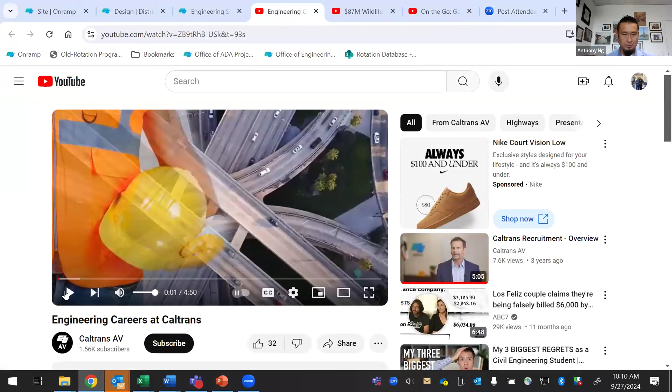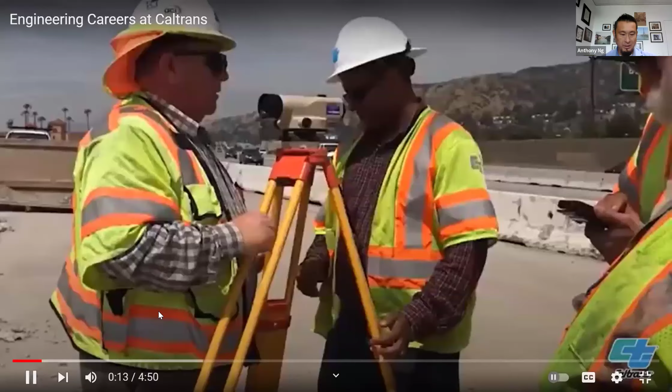Oh Anthony, we don't hear the sound. You might need to share the audio. When you share your screen, it should normally ask if you want to share your audio as well. Okay, go check that. Share, and there you go. All right, how about now?

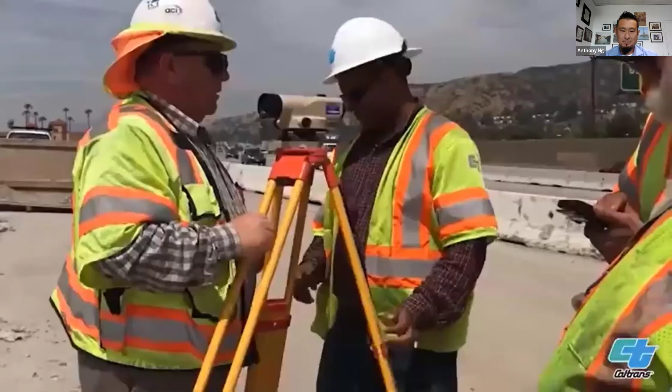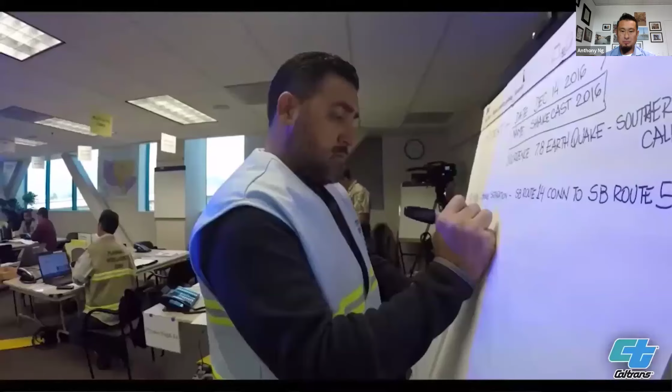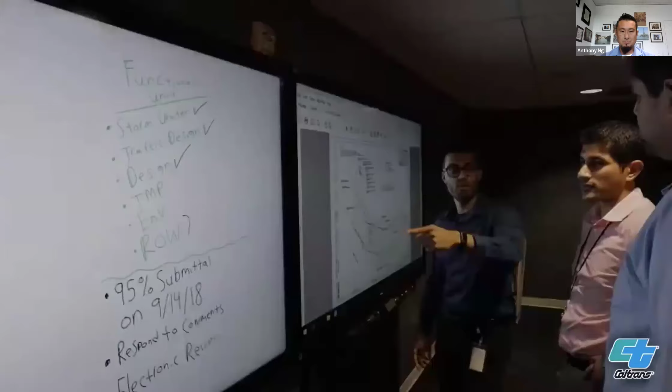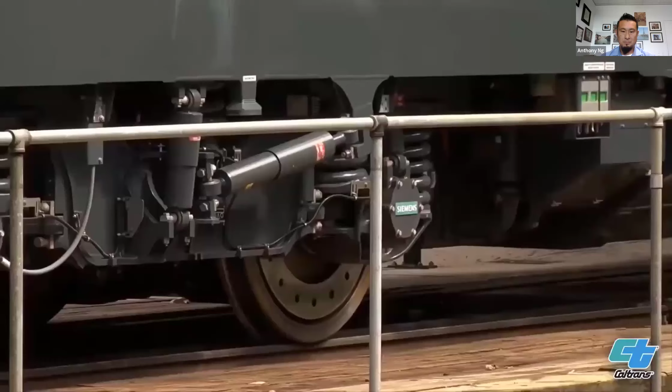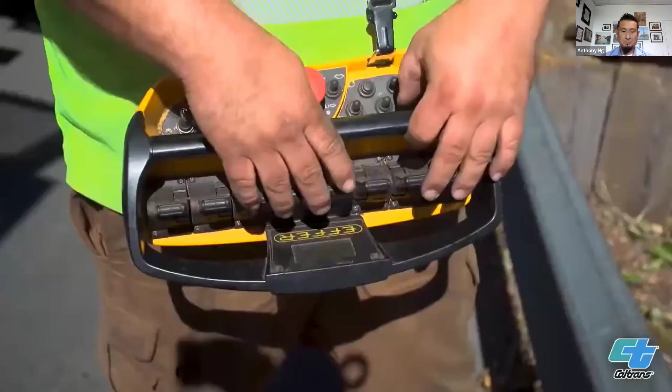Caltrans works with local agencies to manage more than 50,000 miles of California's highway and freeway lanes, funds 3 of Amtrak's busiest intercity rail services, and permits more than 400 public-use airports and special-use hospital heliports. Today, this is my office. One of the things I like most about working for Caltrans is the ability to get out of the office and actually look at the projects we're working on firsthand in the field. Our goal is to be a performance-driven, transparent, and accountable organization that values its people, resources, and partners, and meets new challenges through leadership, innovation, and teamwork. Caltrans is a great place to work.

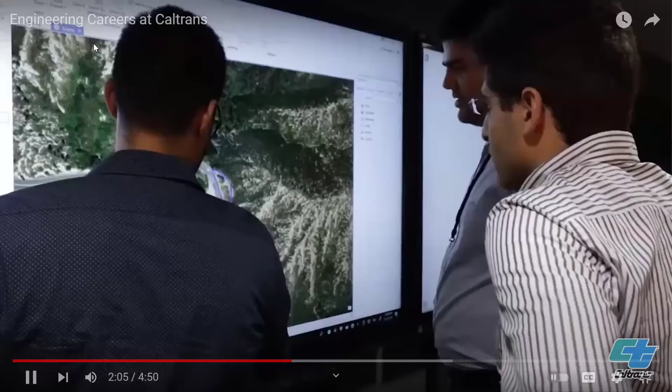Here in design, we prepare plans, specs, and estimates, and we coordinate with maintenance and construction to make sure that our projects are constructible and maintainable. What I love about CalTrans is that there's so much to learn, and I'm surrounded by great mentors who are always willing to help me out along the way.

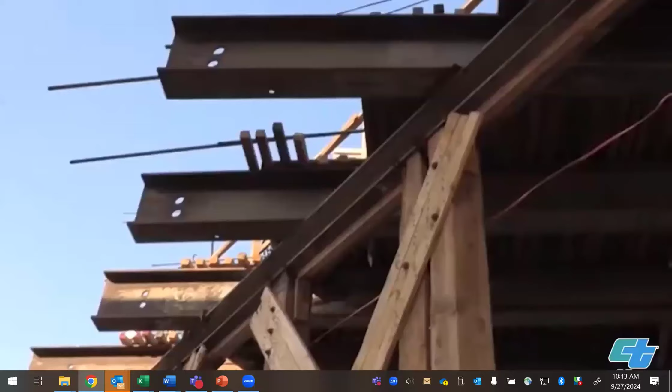There's a certain satisfaction that comes from knowing that I've designed a piece of that infrastructure, and that what I have done is something that will benefit the lives of millions of people.

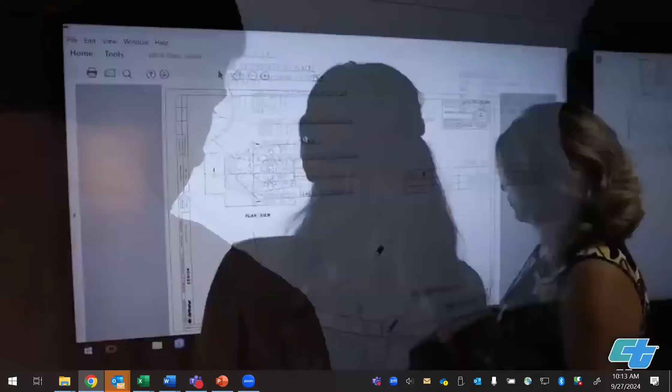I started with CalTrans as a student assistant, and I was instantly drawn to the challenging and engaging projects that I had the opportunity to work on. When a position opened up, I didn't even think twice of applying.

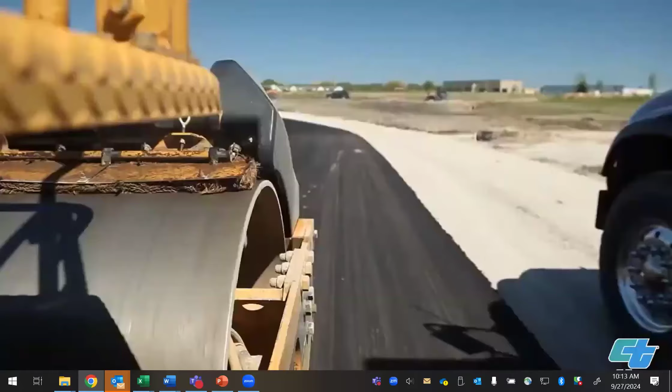CalTrans provides you with the tools and resources to set you up for career success, and working for CalTrans feels like a family. We are dedicated to our vision of a safer, more sustainable, and accessible transportation system for all users. The quality of management and the ability to facilitate and cultivate a positive work atmosphere.

Everyone I've worked with at CalTrans, they know the tangible benefits that they are conferring on the community, and they're proud of it. And they take great pride in not just what they're working on, but the results they see day in and day out.

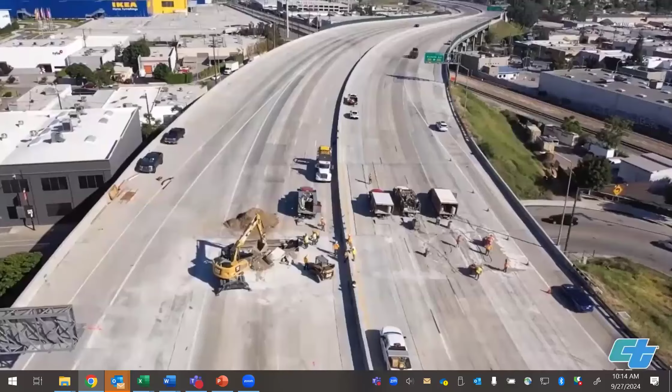So I've been with CalTrans for 26 years, and what I have appreciated the most about working for CalTrans is the opportunities that we have here that you may not have at other state agencies or in the private sector. If you want to work in roadway design or in bridge design, drainage or geotechnical design or environmental engineering, there are so many different opportunities, and you are encouraged to move around.

One of the things I love about working for CalTrans is how diverse we are. So there's a lot of collaboration. Love the environment, love the family nature of working in CalTrans.

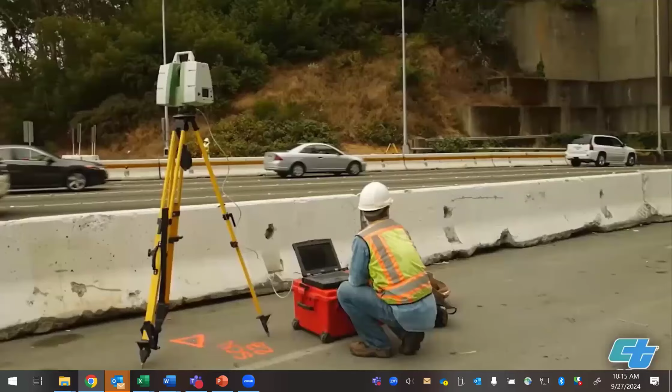As a professional land surveyor, I do have the opportunity to work in the field or in the office. If you love the mountains, if you love the coast, if you love the valley, CalTrans has those opportunities.

I appreciate the ability to explore your career. So if you're not sure what you want to do, there are so many places that you could land and you can find the best version of yourself here.

I would say, do yourself a favor, come work for us. We would love to have you. You would make us better.

Right, so hopefully you guys are all inspired and raring to join us here in CalTrans. But to give you a little bit more background on what else we do here in CalTrans, I just want to go over real quickly the different divisions that we have over here in CalTrans.

So the most important one is design. Once again, I'm from design, so not because I'm the most important one, but it's the most important — that's why I'm in design. But we also have construction, traffic operations, project management, planning, right-of-way, and maintenance. And within each division, there's a lot of different layers as well.

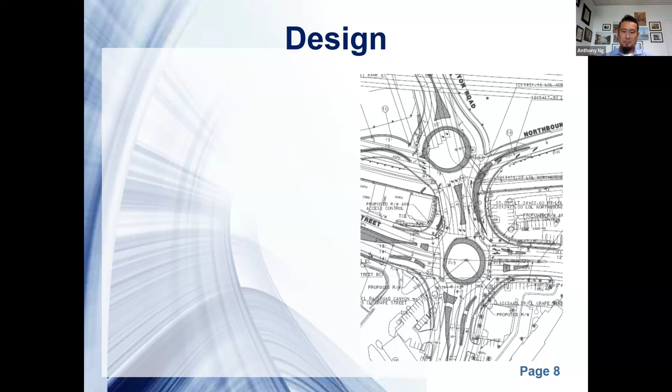And just like you just saw in the previous video, there's a lot of options you have here in CalTrans. So it's not like some of those smaller agencies or even private companies where once you get in, you pretty much get stuck doing that one thing. So within the division of design, we have surveys, GIS, hydraulics, pavement design, roadway design, landscape architecture, and utility engineering.

So, in construction, when you come to CalTrans and go into construction, you're not going to be a contractor. You're not going to be out there pounding nails and whatnot. You're actually going to be more of a project construction manager.

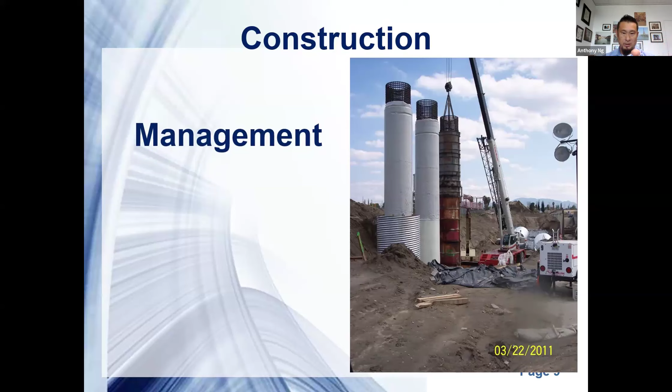Within the division of construction, we have construction management, we have CPM, which is critical path method, and that's where you would come in as an engineer to calculate the fastest path to building a construction project. Because within a construction project, there are many different elements, and certain things need to go before others, or certain things could go at the same time as others. So you'd be the person actually calculating those critical paths.

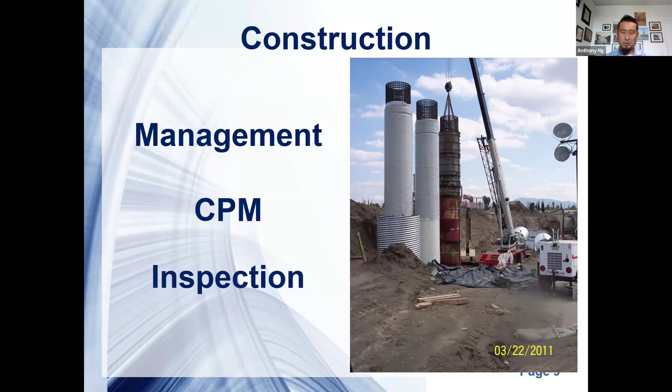Then also construction inspection, where you get the plans and go out there and make sure what they built is actually built per plan. Then we have traffic operations.

And within traffic operations, we have ITS, which stands for Intelligent Transportation Systems. So as you can see here in this picture, there's congestion. ITS is a group where it's like when you watch those NASA movies and they have that huge wall of TVs — this is what ITS does. They monitor the traffic and see where the issues are and how we can fix those in real time.

Then we have transportation safety, the system performance, to where they look and see if there's consistently traffic, which I know you guys probably consistently see, but what we do is we see where there's issues.

We try and send those issues to design to see if we could find a way to fix those issues.

There's also District DTM, which stands for District Traffic Manager. These are the people who, during construction, tell our contractors when they can and cannot build. So let's say if you're in Orange County and we have a project next to Disneyland, we all know it's a mass exodus when Disneyland closes. So usually DTM will tell us, okay, if you're next to Disneyland, you can't perform your construction during the closing time of Disneyland, or even opening time too.

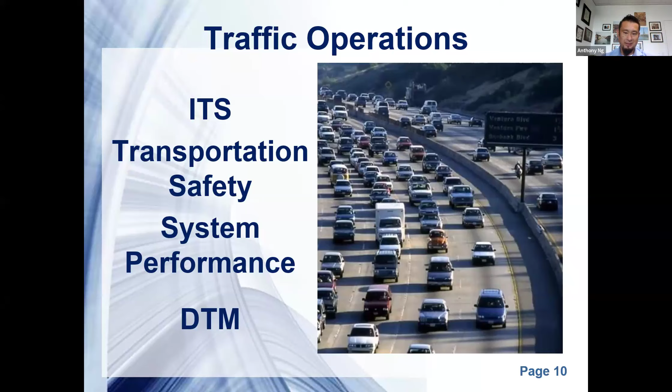Then we have project management. Within project management, we have straight up project management, and we also have program management, where they manage all the funds that go into our projects. It's not just one way we get our money, which most of you probably know is from our gas tax. But we also get money from different places, and if we don't have enough, we try to find other places to fund our projects. That's what program management does.

And also there's risk management, where every project has risks. This group goes out there and looks for different risks, and works with different groups to find out what the risks are to our projects. So either we can anticipate those risks and mitigate, or try and see what we can do to avoid those risks.

Now we also have planning, which besides design is probably one of the more important divisions as well, because they're the ones who look to the future to see where the future needs are.

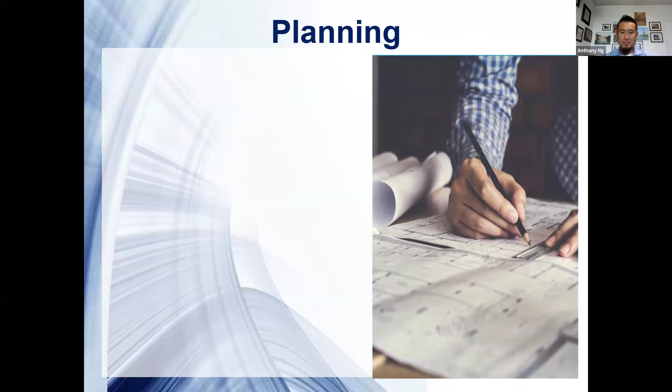Within planning, we have project studies, where they study the various different projects or issues that need a project. Then we have multimodal planning, where they look at not just Caltrans, because as we talked about, Caltrans is mainly in charge of the state highways, but we do work with our partnering agencies like LA Metro, who operates the Metrolink and all the different lines, like the gold line and whatnot, to make sure that all of our facilities work together.

Then we have regional planning, where they look at the region as a whole to see, if we do something in one place, how does it affect another area, or if there's an issue in one area, how does that affect another area? So this group actually looks at everything on the global scale.

If you do decide to come to Caltrans, whether it's through the growth sector or even outside the growth sector, we do have quite a few interesting projects that we're working on, especially here in District 7, the district in downtown LA. One of these projects is the US 101 wildlife crossing, which some of you might have already heard about. This is a project to build a 160-foot wide by 200-foot long bridge over the 101 freeway.

It's mainly to help the cougars out in the area. A lot of you guys might also be familiar with P22, the one that passed away unfortunately a couple years ago. Unfortunately, we didn't get a chance to get this built for P22, but there's definitely P22's friends and relatives that could benefit from this wildlife crossing.

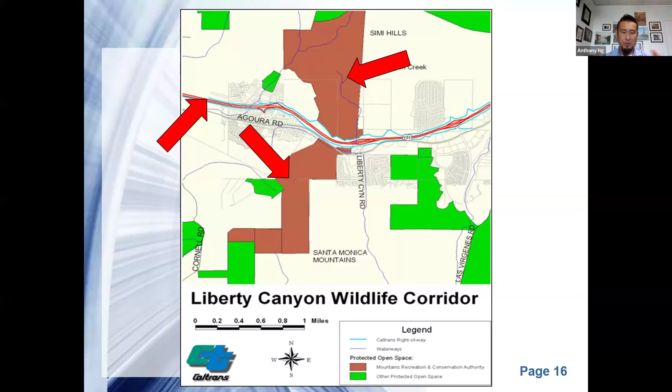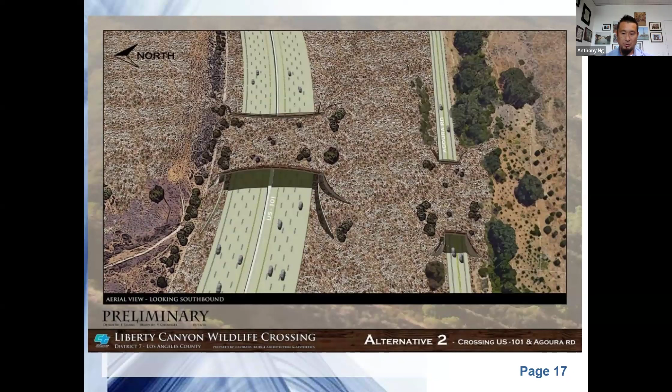So these are the mountain lions we're trying to help out. This is a rendering of what it's going to look like. Literally, it's a wildlife crossing that's above ground, a bridge with soil on top and vegetation and everything, so it looks like natural ground. It won't be too intimidating or scary for the mountain lions to make this crossing, going from north to south and vice versa. So that's a bridge over the 101.

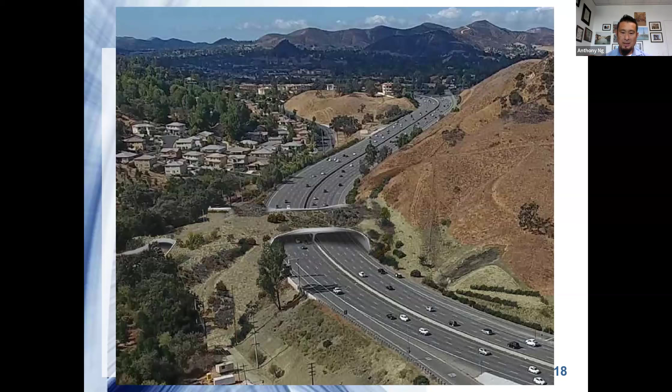Then we also have a local road, Agoura Road, that we're going to have another small bridge over as well. This is another rendering, a 3D view, of what it should technically look like. Right now I think we just put up the girders. If you live in the area or pass through, you might have seen a few months ago they actually closed the entire freeway to put up the superstructure girders to support this. Now I think they're working on the deck as well.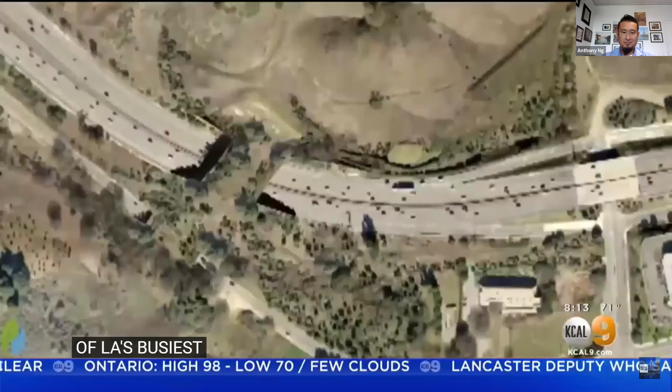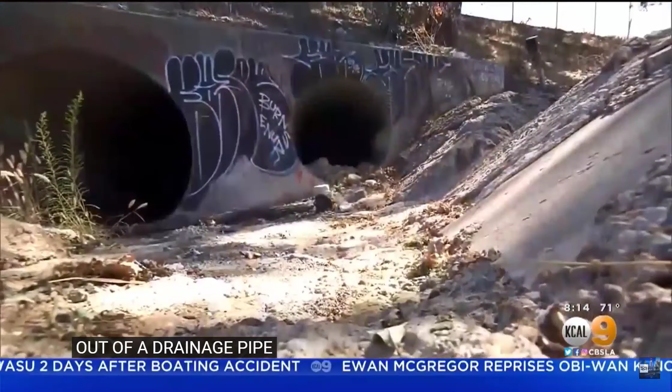Southern California is famous for its freeways, and now we're one step closer to building a major thoroughfare just for wildlife. An $87 million wildlife bridge over the 101 freeway in Agoura Hills entered its final design stage. Carter Evans shows us how it will help animals cross over safely. Mountain lions and other wild animals have lived in the heart of Los Angeles for centuries, but the freeways that were built to connect people ended up isolating wildlife. Hoping to preserve mountain lions and other species, officials are in the final design stage for a crossing over one of LA's busiest freeways. We're currently in construction. Beth Pratt is with the National Wildlife Federation. This is not going to look like a standard overpass. No, these are beautiful, they're not just bridges, these are vegetated landscapes because the animals have to feel safe. The overpass would stretch 200 feet over 10 lanes of highway and provide big cats, coyotes, and other creatures better access to not just food, but also potential mates. If we don't provide connectivity, they can't get dates outside their family, so they are at risk of going extinct. Like all of us, the 101 divide has killed many a romance. Since the National Park Service started tracking mountain lions in 2002, 18 have died trying to cross freeways and other secondary roads. Without the overpass, animals have been forced to take risks or get creative. Which mountain lion was it that made it through here? It was P64. This image captured P64 coming out of a drainage pipe last year. We found this long, dark tunnel that unfortunately isn't great in terms of a wildlife crossing in general. So far, the National Wildlife Federation has raised more than $13 million from private donors, and they're confident they'll raise the remaining 50 to 60 million. Completion is set for 2023. We're going to inspire the world what's possible in LA. If LA can do it, nobody else has an excuse. Carter Evans, KCAL 9 News.

Yeah, this is a little bit older video, but I still wanted to show you because it goes over the background. Some of the newer videos go over more of the construction, but once again, not as much of the background.

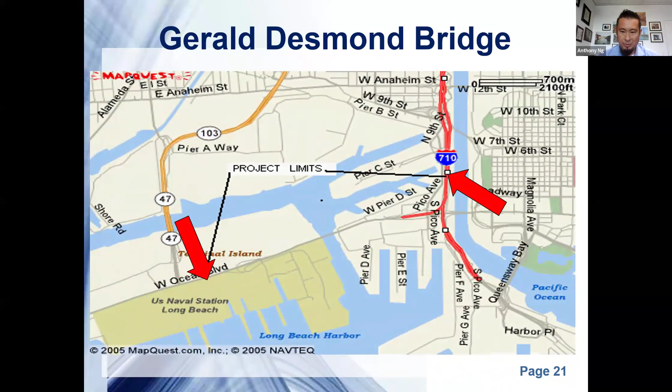Another interesting project we're working on is the Gerald Desmond Bridge. This is a bridge located in Long Beach, going from close to the 47 freeway all the way to the 710 freeway. The purpose of this project is to raise the elevation of the bridge, because the existing bridge is getting to be a little bit too low. With all the shipping cargo ships coming into the port now being bigger, they're designing and using bigger ships which can take more load, so all the cargo is actually getting even taller.

Right now the Gerald Desmond Bridge is not tall enough to handle all the new cargo ships that need to get into our port of Long Beach. On top of that, the existing bridge is a little bit on the old side, so it's starting to break down. It's still safe, but we are working on tearing it down.

If any of you live close to the Long Beach area, you might actually see the construction we've done to build this bridge. While we're at it, we're adding 2 lanes to the bridge, and we want to increase the vertical clearance so we can accommodate all the new cargo ships coming into our ports.

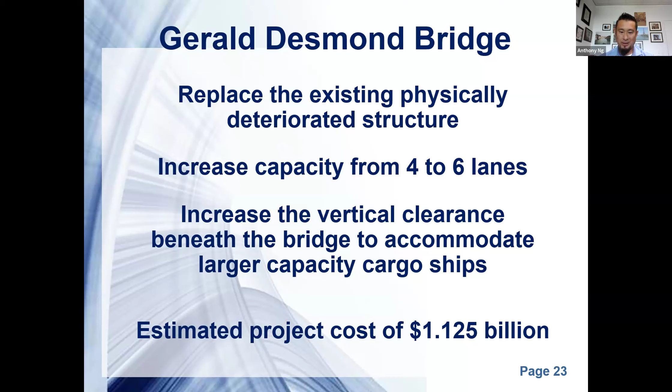The cost of this project is 1.1 billion and change. So it's up there, it's one of the bigger projects we're working on. 1.125 billion. Yeah, it's a lot of money.

So here you can see a progress picture, a little bit older too, but I want to show this so you can see how we build things, especially within existing infrastructure. This one shows it as we're building it. The Gerald Desmond Bridge is a critical bridge, and that's why it's so important that we raise it and widen it.

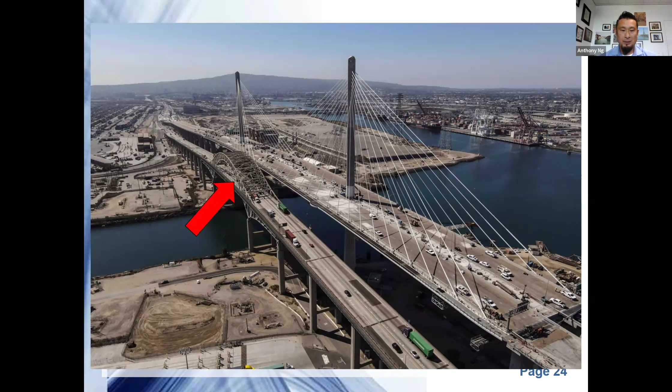You'd think it'd be easier if we just tear down the existing bridge and build a new one. But if we do that, it takes 2-3 years to build because it's such a big bridge, and this is a cable bridge, which would mean people can't use it for 2-3 years.

So the way we do things in civil engineering is, guess what, we actually build the new bridge next to the old bridge. As you can see here, the old bridge is still there and the trucks are still using it while we're building the new bridge. Once we're done with the new bridge, then we tear down the old bridge.

It takes a little bit more coordination and extra ingenuity, but that's how we work around some of these issues in the urban areas we live in, where we can't just tell everybody to deal with it for 2-3 years while we make this work. So we're doing our best to work with everybody as we're improving things for everyone.

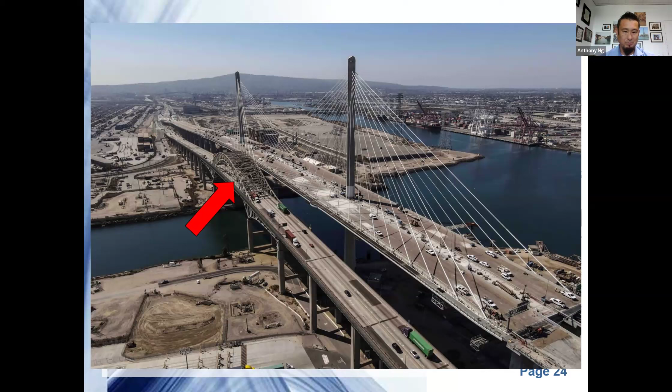All right, and with that, we'll take another quick look at the video.

Port of Long Beach and transportation officials, legislators, civic and community leaders, and members of the press recently gathered beneath the Gerald Desmond Bridge to kick off a historic project that will reshape the Long Beach skyline. The Gerald Desmond Bridge replacement project is officially a go.

This new bridge, as you know, we've termed the bridge to everywhere. It's a culmination of efforts by a lot of stakeholders at the federal, state, and local level. Through the leadership of the various stakeholders, you have the result. Now estimated at a cost of $950 million, it's going to be a state-of-the-art bridge. It says California's on the move again, at a time when there's not a lot of infrastructure being built in the United States. Besides the ports, we now have the connecting corridor, the Colton Crossing, and the Desmond Bridge. The 2 key things are going to be fixed, and it's just wonderful.

The project will bring thousands of jobs to the region, improve traffic conditions and air quality, and help the port remain the premier gateway for international trade on the Pacific Rim. From a local economy standpoint, it's about 4,000 jobs a year for the next 5 years while we're building this thing, and it's going to be a fantastic icon for the city of Long Beach. This project is critical for us to keep our competitiveness and to keep those huge contracts that currently reflect thousands and thousands of jobs.

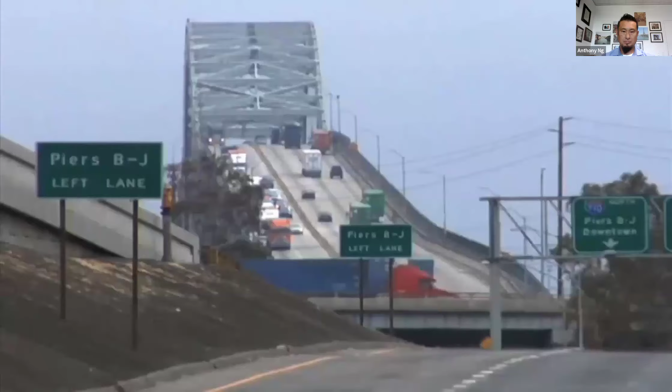When the bridge opened in 1968, no one could have imagined the traffic and trade volume demands being placed on it today. The Gerald Desmond supports 68,000 traffic trips each day and connects 15% of the nation's waterborne cargo to the marketplace, and it does all of this with only 4 lanes sitting precariously low for the cargo vessels that must pass beneath.

And although this aging bridge is safe to drive, it is deteriorating. You'll notice it has netting underneath it, and parts of the concrete are breaking from the rebar. It's an old bridge, past its useful life, requires an enormous amount of maintenance, and it's not high enough to accommodate the new efficient cargo carriers that come in here. So it really does need replacement, and it's a major piece of infrastructure for the ports.

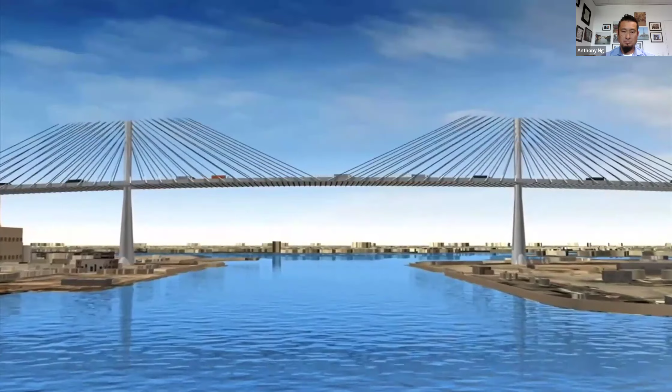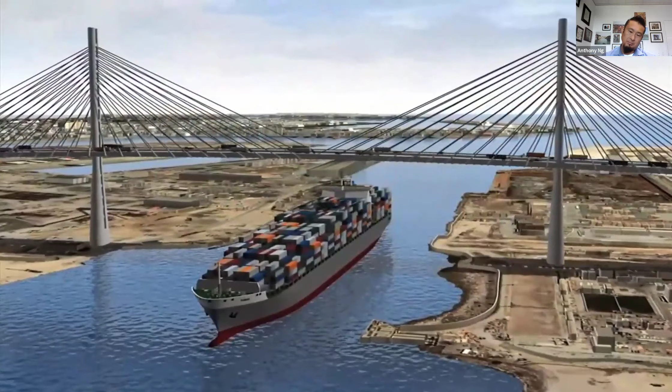The new bridge, which will cost nearly $1 billion to build, is expected to generate more than $2 billion in economic activity here in Southern California. It will be 6 lanes wide and include emergency lanes to prevent delays, and be tall enough to allow the latest generation of megaships to pass safely beneath. It's going to accommodate the bigger vessels, and those bigger vessels calling on the Port of Long Beach are more environmentally friendly.

The grade will be much more gentle. It's 8% grade now, it'll be a 5% grade. Better gas mileage from the trucks going up, less emissions. So that's another huge environmental benefit. And again, it'll enable us to grow this port and get more cargo, which means more jobs and everything else. So it's got a lot of benefits.

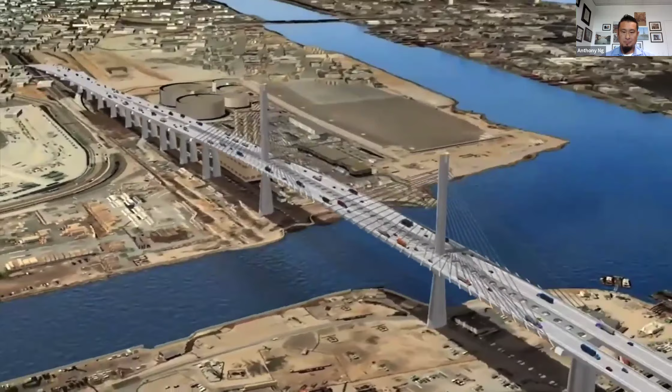Preliminary construction will begin in 2011, and both CalTrans and the Port of Long Beach will work together over the next 5 years to ensure the project's success for the good of the local community, the region, and the entire nation.